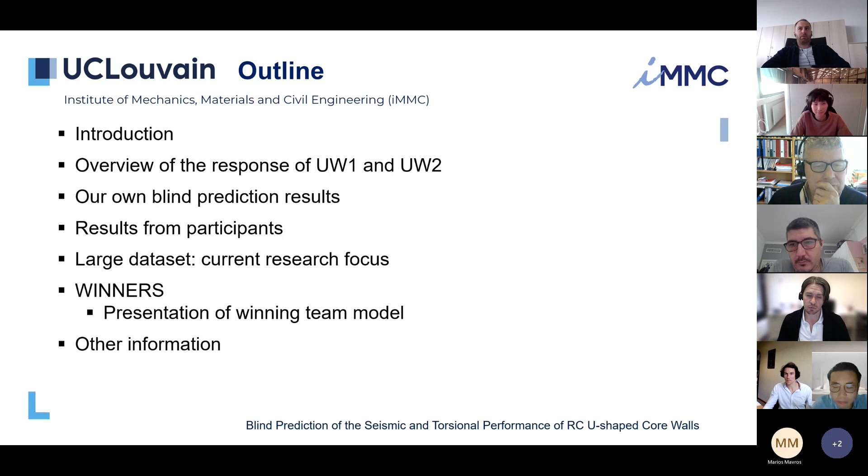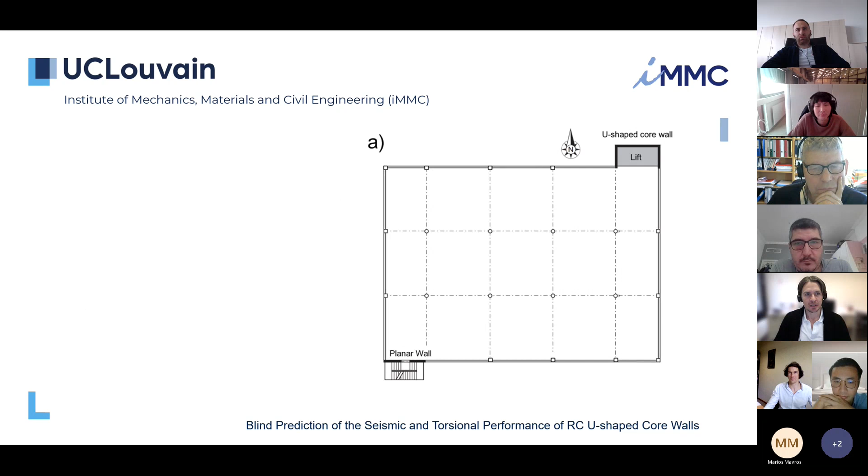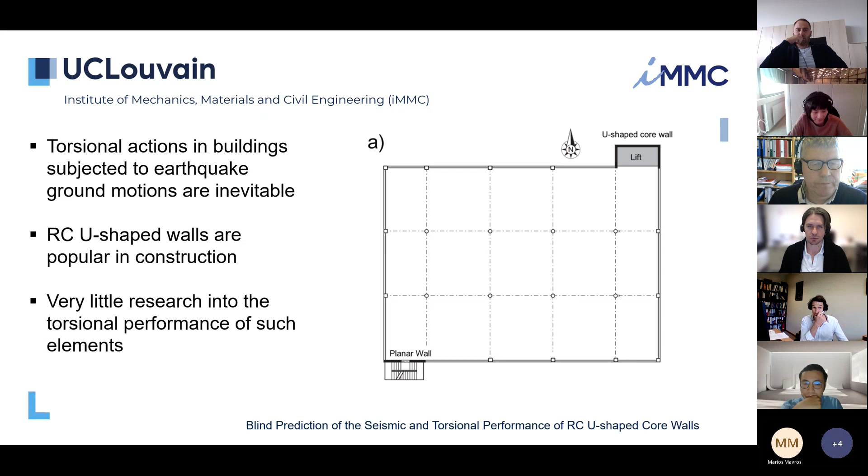So just a quick overview. Torsional actions in buildings subjected to earthquake ground motions are essentially inevitable, and reinforced concrete U-shaped walls are very popular in construction. A good analogy is a building like the plan on your screen, where you have this U-shaped core wall essentially enclosing an elevator, on the periphery of the building. If you get strong north-south ground motions, as an example here, you can expect this building to essentially twist, so this wall will essentially be resisting all of those earthquake ground motions.

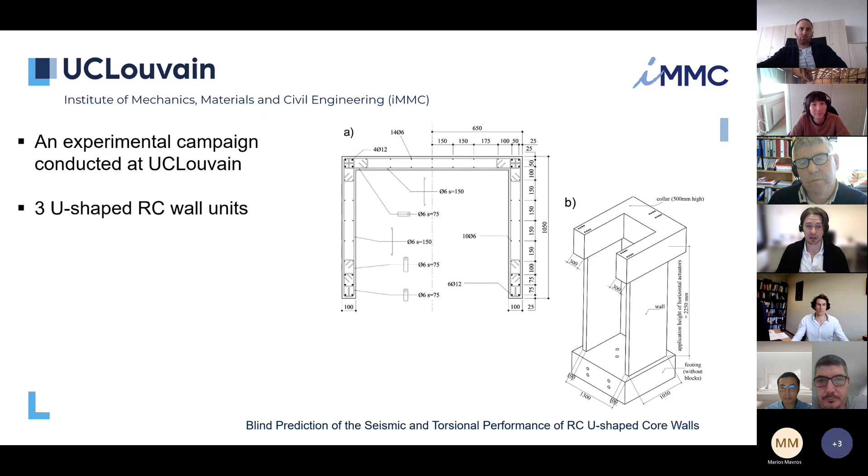Very little research has actually gone into looking at the torsional performance and also the torsional capacity of such elements. So we recently conducted an experimental campaign. We looked at 3 different U-shaped wall specimens, and the first 2 of these specimens were the focus of the blind prediction competition. That was primarily just for timing - we wanted to give as much time to you as possible, although we know it was only a couple of months, and I think that was over the summer break.

So I think that was a little bit difficult for everyone. But yeah, so the first unit, UW1, was subjected to in-plane bending, so governed by flexure, and the second wall was, of course, rotated about its vertical axis, so with torsion.

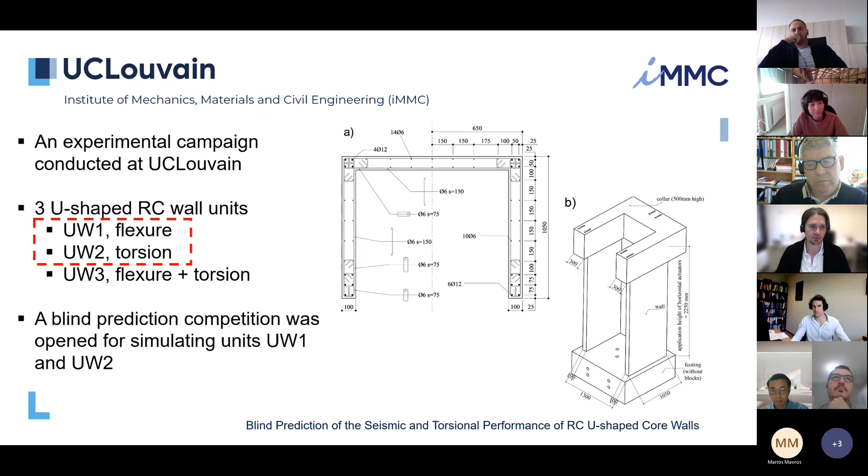Just again, a quick summary - I know a lot of the participants are here with us, and you certainly already know this, but for everyone else, basically we wanted to make this a really complete blind prediction competition where we didn't just focus on things such as force and displacement. So we actually made this compulsory information - you essentially had to give these predictions to enter the competition - focusing on strength and capacities. So for the first wall unit it was really focusing on force and displacement capacities, the second wall unit was focusing on torsion and rotation, so ultimate torques, for example.

The second thing that we asked for, which we called optional information, was looking more at the local sort of performance of the wall - things like the maximum tensile strain at a certain position or at a certain drift level, or the residual displacements for certain in-plane drift levels. We thought that while these things were very difficult to simulate, you were rewarded a lot of other points if you had really good estimates. We thought that was really an exciting opportunity to include in our blind prediction competition, which was a little bit different from previous blind predictions.

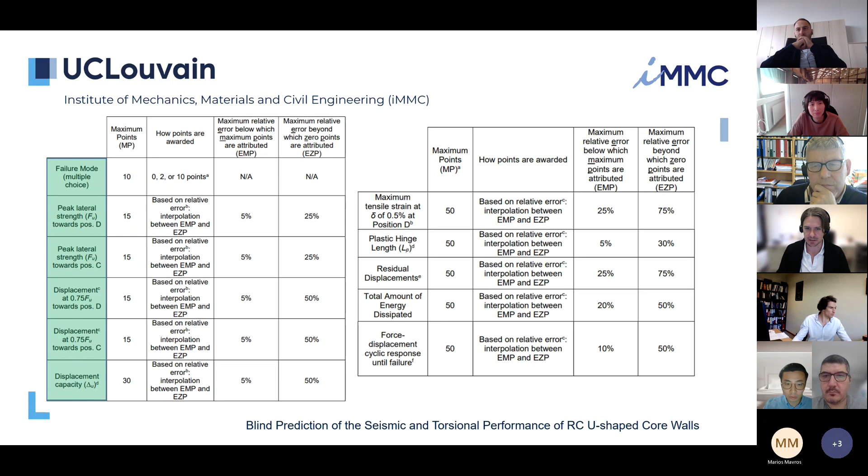Okay, some quick videos. I hope that the bit rate of the internet here will actually show these reasonably well.

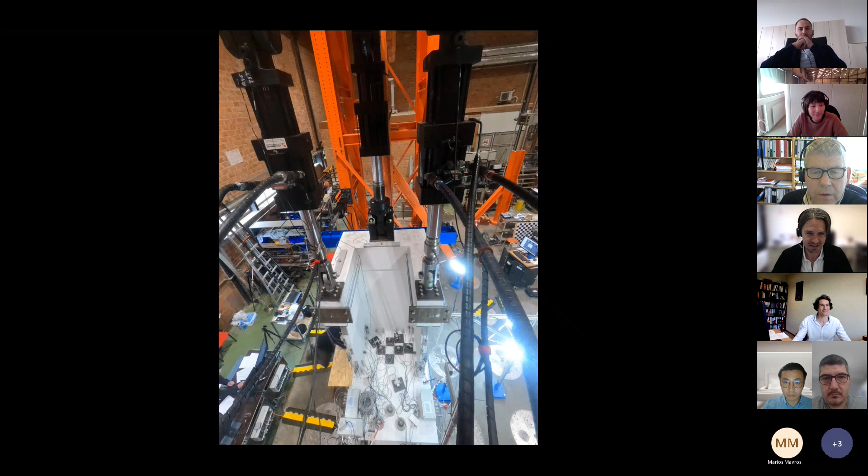This first video is looking at the first wall specimen where we had the vertical actuators. The vertical actuators were applying the axial load as well as the overturning moment, and you can see there's two horizontal actuators at the back applying the horizontal force and displacements.

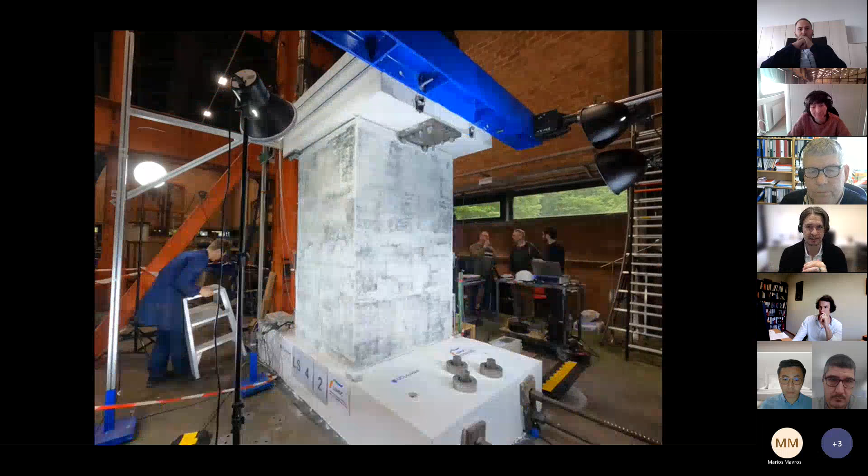This is a video from the back of the wall of the first wall unit. Again, you can see these actuators were connected with the beam. That was primarily for the second wall specimen where we really needed that beam to increase the torque applied. It wasn't really necessary for this first wall, but we wanted to keep the same test setup for all of the wall specimens.

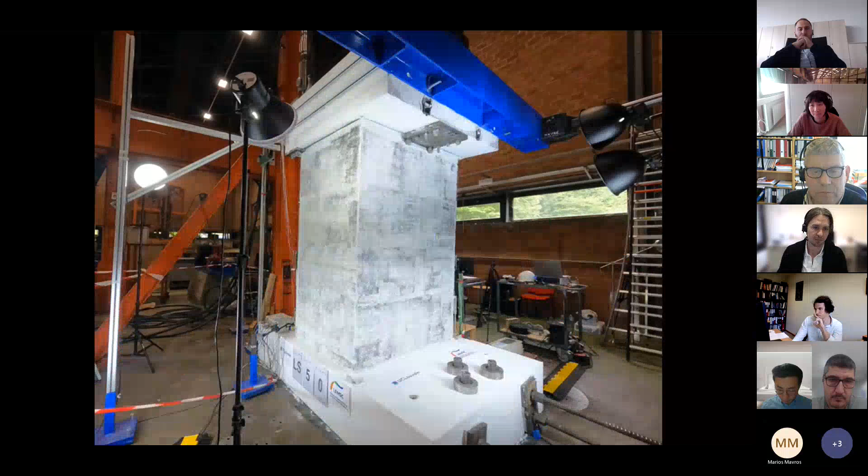This third video, again, is of the first wall specimen, but it's going to show where the failure occurs on this flange end, where you'll see some crushing failure and the buckling of the rebars. I think it accidentally just paused, so you'll see it there.

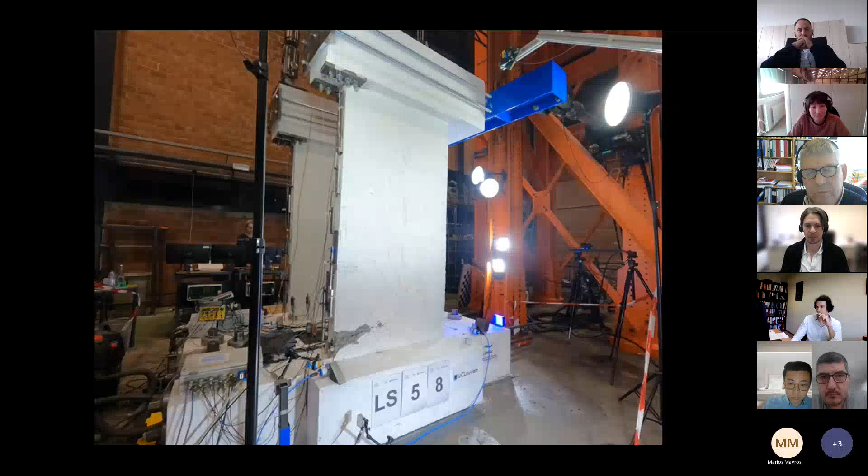The second wall unit was rotated about its vertical axis in reverse cyclic motion, and this video will clearly show where the failure occurred. This was a little bit more complicated in terms of its failure mode than the first, and really required a lot of observation in terms of how it actually failed and where. You can read all this in the report that we'll release after this presentation.

In terms of our own blind prediction results, we wanted a really good estimate of what sort of forces and displacements we were expecting to see in the experiment. We just did some simple pushover analyses, but using a fairly sophisticated program called VecTor4.

This is for the first wall specimen, so we had to model the actual shear span that we were applying. Instead of just making a model that was about 2.25 meters tall, we had to apply the entire shear span up to about 6.5 meters. In comparison to the experimental results, it actually did reasonably well. It wasn't able to model the buckling we observed at the boundary end, so it did overestimate the displacement capacities a little bit, and overestimated the forces a little bit.

But overall, pretty good. And once we have these experimental results, we can get a much better result by tweaking a few things and making it a little bit better.

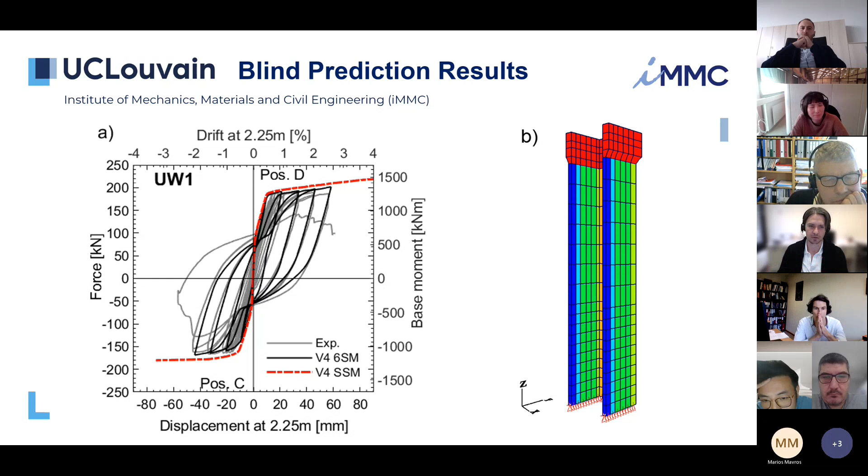You'll see here as well, this red line is the SSM, the single story model. So that's when I have just the single story, the test unit height, and I've applied a force controlled analysis using all the forces we actually applied experimentally. This is the single story model instead of the actual model to the shear span.

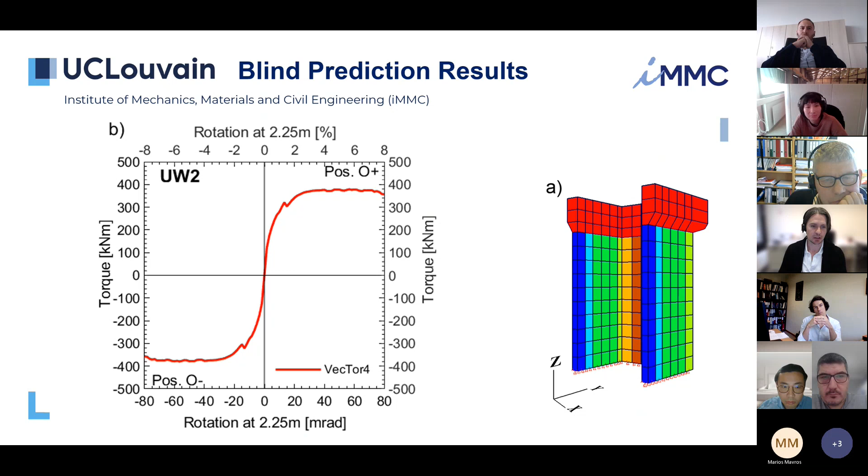We use this model for the second wall specimen. This was our best guess in terms of the expected torque and rotation, and this is what we saw experimentally. It actually really underestimated the torque that we got, and it really overestimated the rotation capacities as well.

What was really important for us in modeling this was really modeling the head of the wall, where in previous numerical models, where we had the wall just bending in flexure, we essentially made this head of the wall really, really stiff to remain elastic, which it typically has throughout these experiments. But for this torsion wall, we actually had to relax that a little bit.

And we got much better results, of course, once we had those experimental results. So we're still working on these numerical models, and we do plan to do a little bit of work in this area in the very near future. I guess we'll have a little bit more to say on that towards the end of the presentation.

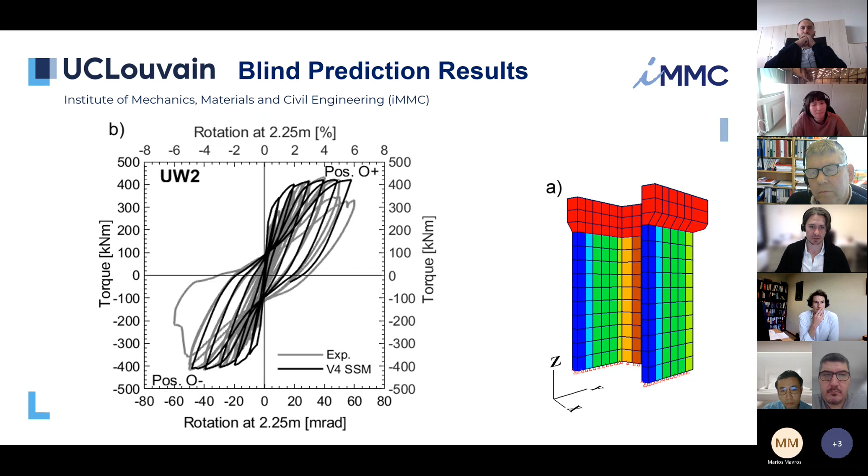I should say that we had 15 applicants in total. In the report, which I will send via email to all participants and registered users just after this presentation, it will show which program was used by which different participants.

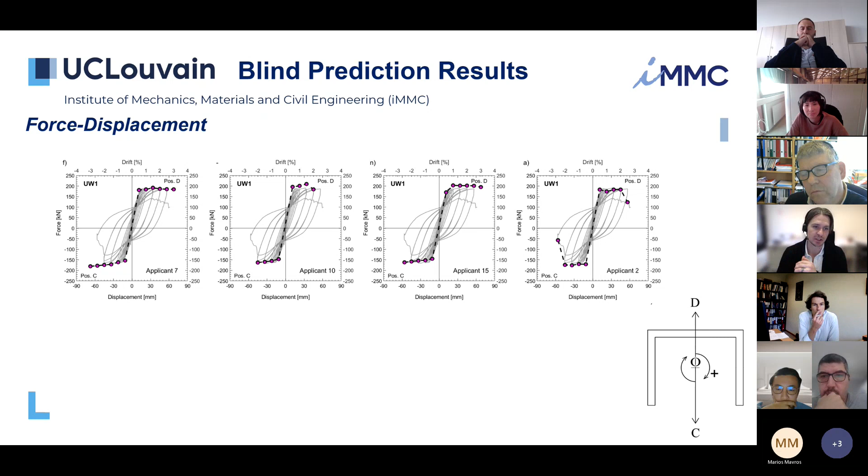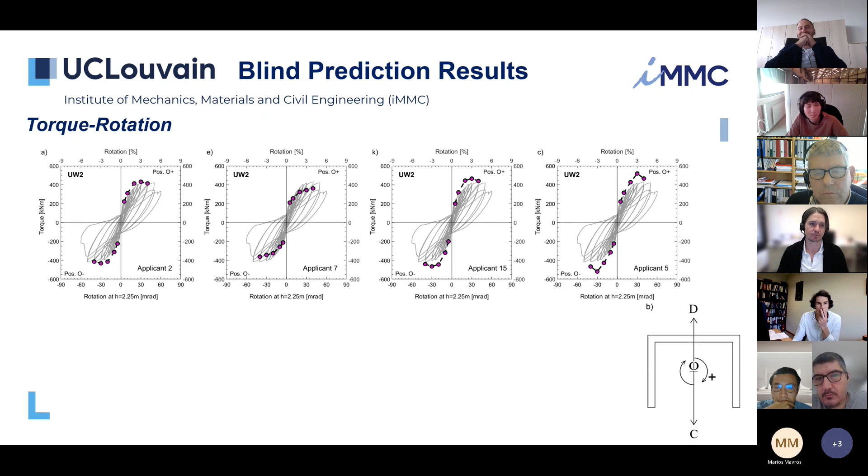One of the things we focus on in our research team is residual displacements of reinforced concrete walls, which was one thing we asked for in the optional information. For those unaware, residual displacement is the displacement achieved on returning back from an in-plane displacement or drift, when the force is equal to zero. We typically look at these as a function of the displacement or drift achieved.

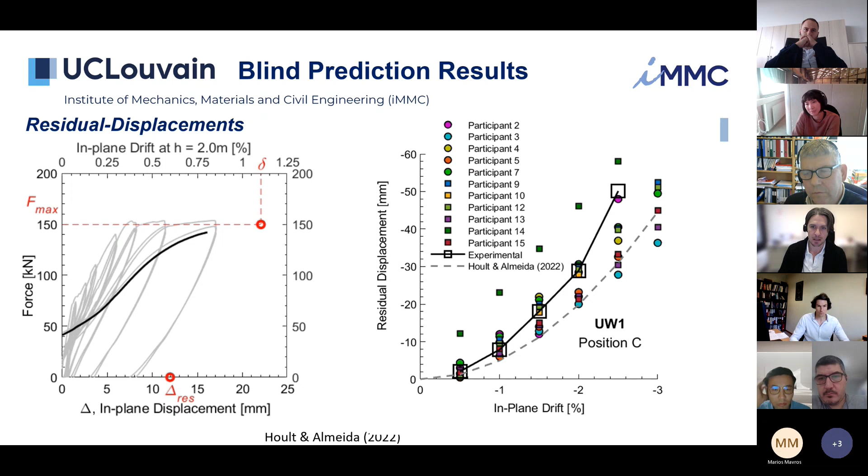This is a plot of the residual displacements given by all the different participants. The experimental results are shown in the black square symbols. You can see some participants had strong estimates compared to what we observed experimentally. This is the residual displacement toward the position where the wall failed for the first wall unit; we also had residual displacements in the other direction, which gave interesting results. This gray dashed line came from an expression that João and I derived earlier in the year, looking at a large data set of experimental walls, taking an average line of all the residual displacements.

Something, Ryan, that was maybe good to note—I guess there are relatively few U-shaped walls there, right? That can partially explain the difference.

I think there were a few reasons for the difference between the experimental results and the gray dashed line. If you look at the residual displacements in the other direction, it's actually a very good match toward position D, which is governed by tensile strains in the flange end. I think buckling that started occurring quite early really affected the residual displacements in this direction. In this database we used a lot of different walls, but many of the tested walls are planar in cross section, which could be one source of the variability.

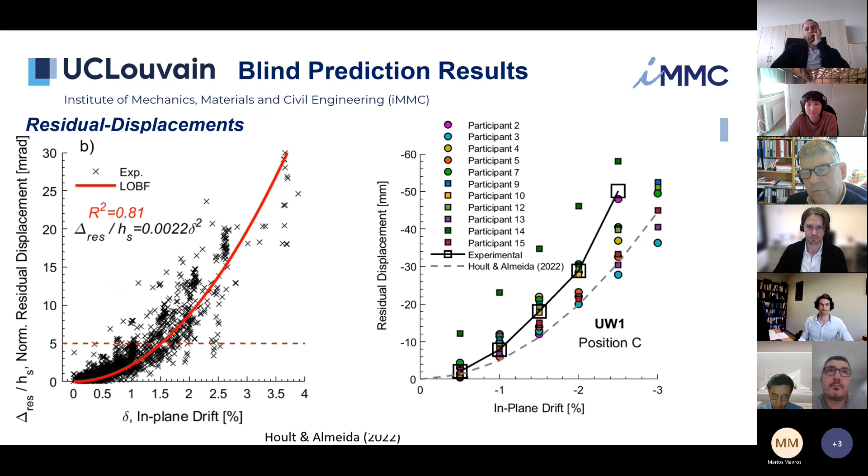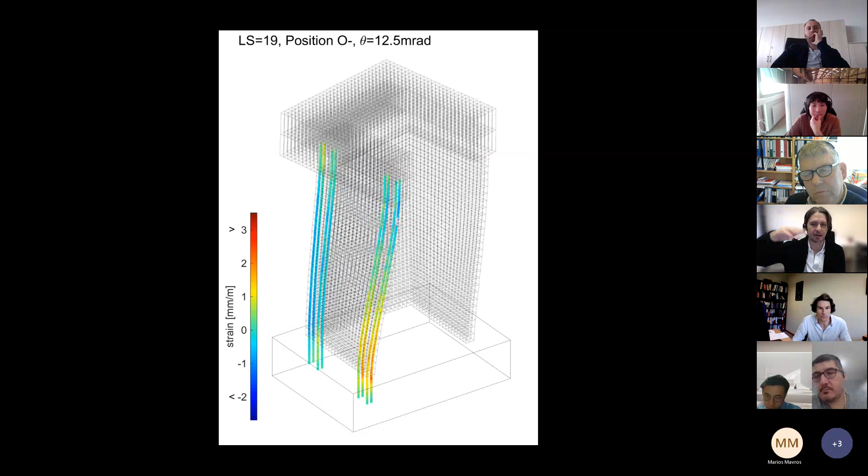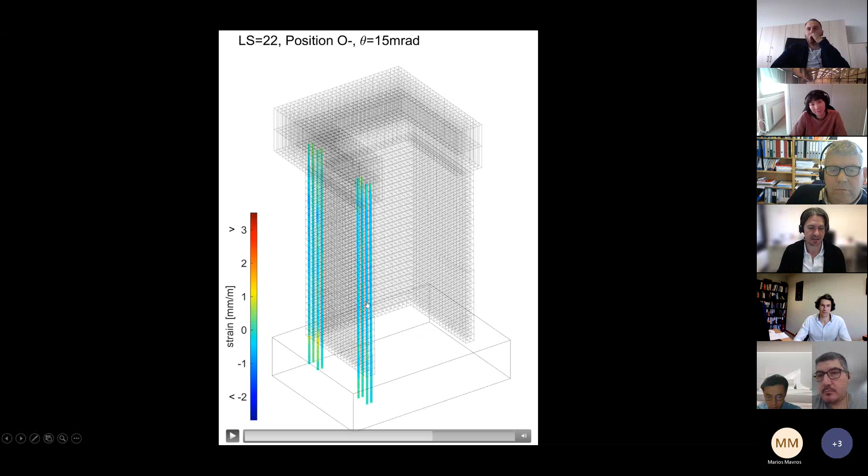One of the exciting things for our research team was using distributed fiber optic sensors, attached to 8 of the longitudinal bars in the wall. What you're seeing here is a finite element model grid, but the colors representing different strains in the rebar are experimental measurements. These strains are at really high resolution—along the rebar length of about 3 meters, we're seeing strain increments every 0.65 millimeters, and importantly, strain penetration into the foundation, which was really cool to see.

This is how we were able to answer one of the optional information questions: what is the maximum tensile strain in the bars for a specific rotation and position. The black line is the average of the two rebars, and this white circle is the maximum of the average, which is what was actually asked for in the rule sheet. It's interesting to note the dark blue and light blue profiles—the two different strain profiles for the bars at this flange boundary end.

If we look at the strain profiles for the first wall, which was just pushed back and forth, the strain profiles are actually very similar—you really can't tell the difference between the two. But when you have warping torsion and a bit of circulatory torsion in these flanges, you do see a difference in the strain gradients through the thickness.

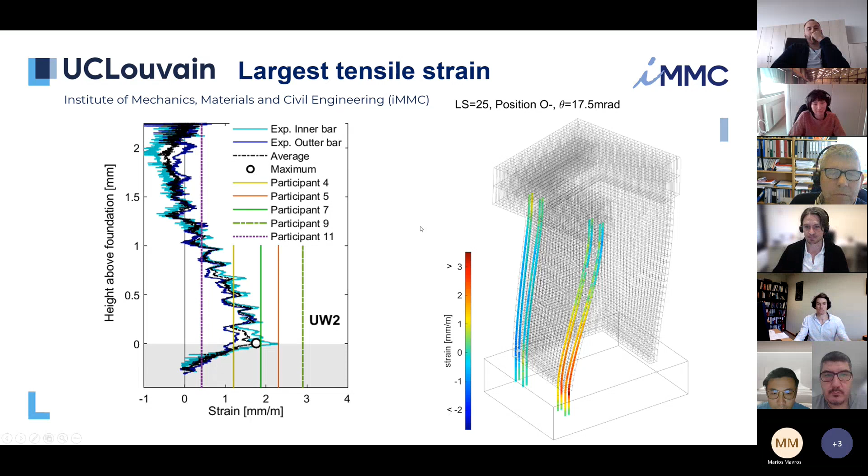A quick note on the current research focus using this large data set from the walls: now that we've got strains within the wall core, we're looking at how they compare with surface measurements made with things like the LVDTs, shown here. We had 8 rebars in total giving us a nice strain profile in the wall—how do they compare with the LVDTs on the surface?

This is just an obvious quick point—clearly you don't get that strain penetration with the LVDTs, so you can really see the difference in terms of the strain profiles that you get.

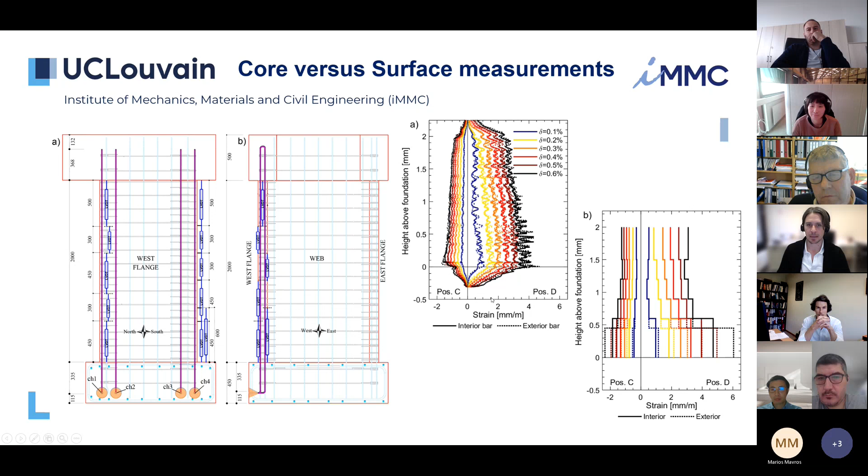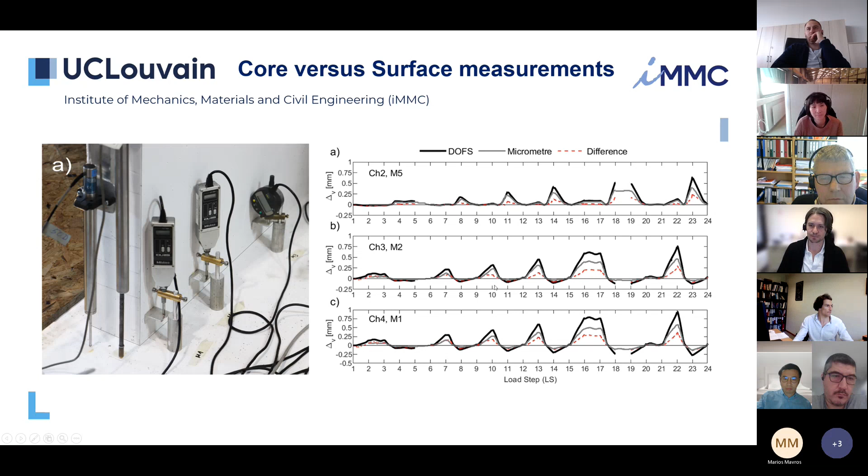We're also making comparisons with things like the micrometers. Again, with surface measurements, you can clearly see the vertical displacement is quite different from what you see inside the wall with the distributed optical fiber sensors compared to the micrometers in the wall. Lastly, we're also making comparisons with DIC, digital image correlation techniques.

I won't go into too much detail here, but we're really using these measurements from the fiber optics to provide some sort of guidance in terms of what gauge length or base length you should be averaging your digital image correlation results over, to arrive at strains and values that are more representative of what we actually see with large scale structures such as these walls.

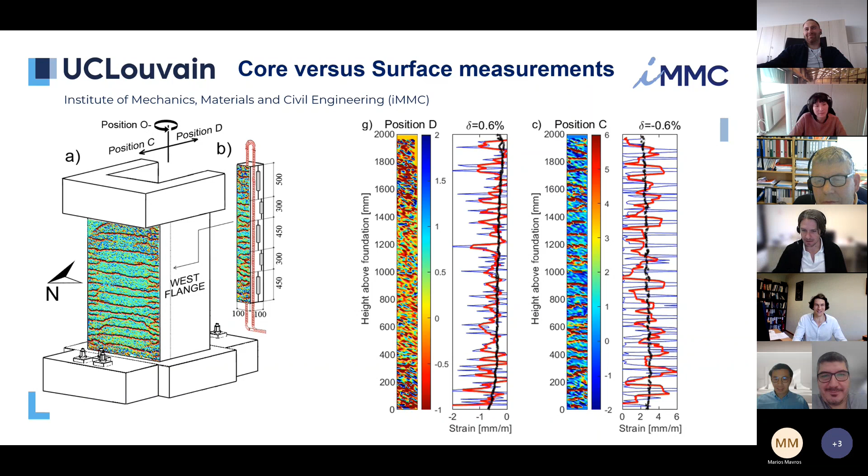Don't be shy. I think you're all eager to find out who won then. Okay, so if that's the case, let me pick this over and let's go.

Okay, so drum rolls, I do the easy part of the job. So the Oscar goes to... actually I should already say that the Oscar goes to both for UW1, the first test unit, and the second. They go to the same team, actually.

So Ryan, it goes for the team composed by Manos Mavros, Juan Murcia Delso, and Marios Panagiotou. I think only Manos is from the University of Cyprus. Actually, I think Juan is from Universitat Politecnica de Catalunya, and Marios Panagiotou works for a private company at this point.

So they have done an excellent job. I think we don't show it in this presentation, but the results for UW1 were very similar in terms of points to the second and third team, which I will present right after. For UW2, the difference in terms of points was a little bit larger.

So second and third place now. For UW1, from UCSD, San Diego, we have Sergio Godinez, Andres Rodriguez, and Jose Restrepo; then from the Hong Kong University of Science and Technology, we have Shenghan Zhang and Liang Liu; and from Switzerland, from the Federal Roads Office, Raluca Constantin. So these are the first, second, and third place for UW1.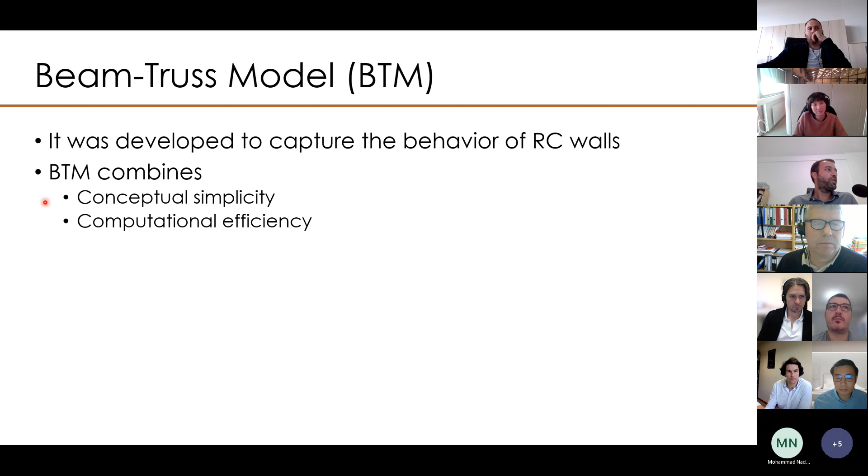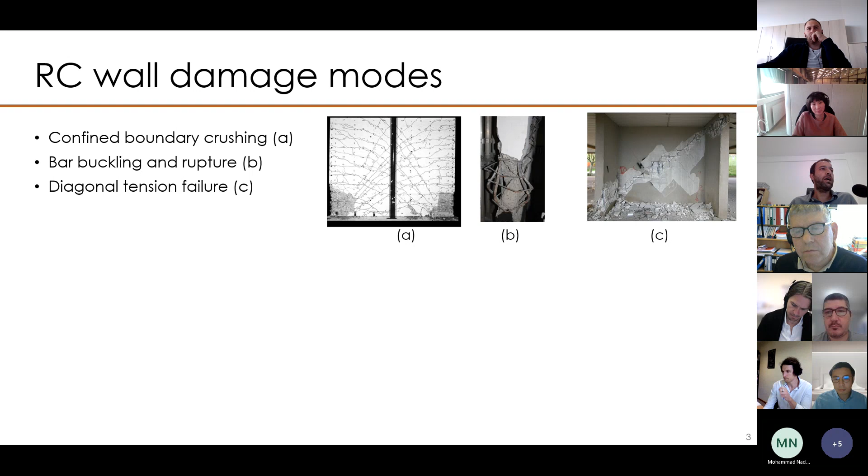The failure modes of reinforced concrete walls observed in past earthquakes are usually more complex than those of beam and column members, and can be affected by a multitude of damage patterns like flexural failure of confined boundary regions in the form of concrete crushing followed by bar buckling and rupture, diagonal tension and compression failures with web crushing, global out-of-plane buckling, and out-of-plane crushing of the walls.

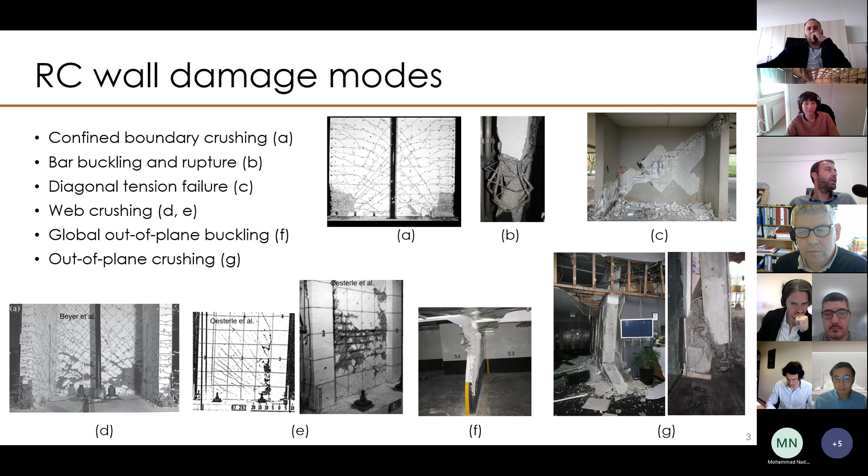Allow me to give a quick summary of how the method works, using as an example a portion of a T-shaped reinforced concrete wall. First, we discretize the section into smaller areas, and then we determine the areas of steel and concrete.

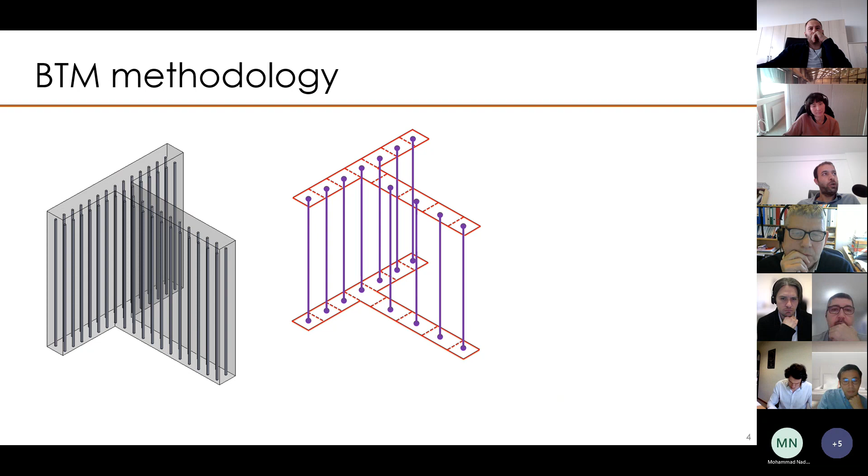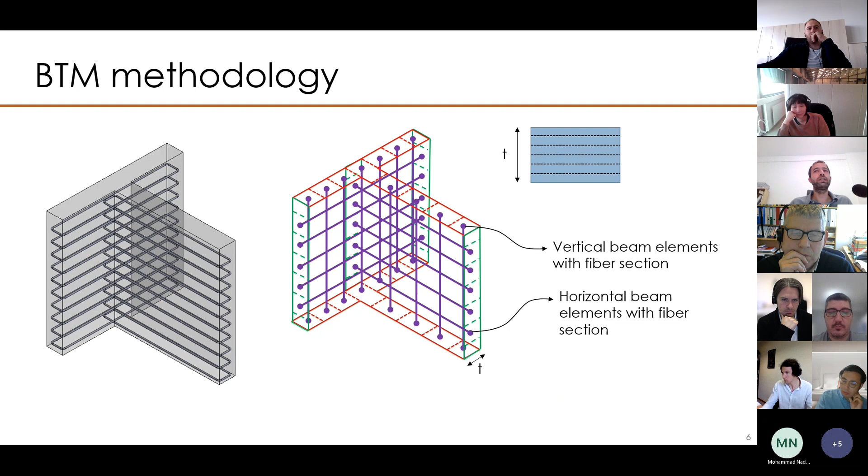The method uses vertical nonlinear fiber section beam elements to represent the vertical areas of concrete and steel, and exactly the same thing happens in the horizontal direction with horizontal beams. Both horizontal and vertical beams have fibers that represent steel and concrete only along the thickness of the wall, hence they can develop only axial and out-of-plane stiffness.

The in-plane stiffness comes from the inclined trusses. A critical part of this method is that the inclined trusses can model the diagonal compression field of concrete, accounting for biaxial effects, done at the material level using a beta reduction factor that I will describe in the next slide.

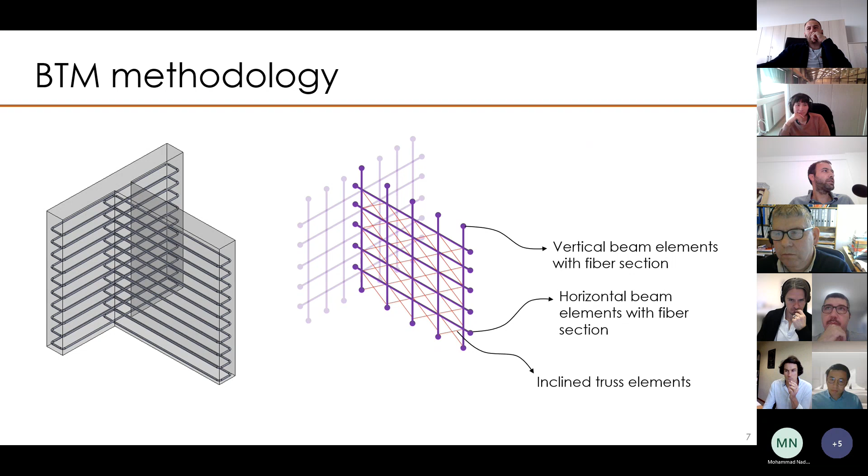For the concrete material law, we employ a constitutive model by Lu and Panagiotou, which can account for the strength degradation of unconfined concrete in uniaxial compression and tension. It can also account for the increased strength and ductility of confined concrete, and includes appropriate unloading and reloading rules to account for the cyclic hysteretic behavior of the material.

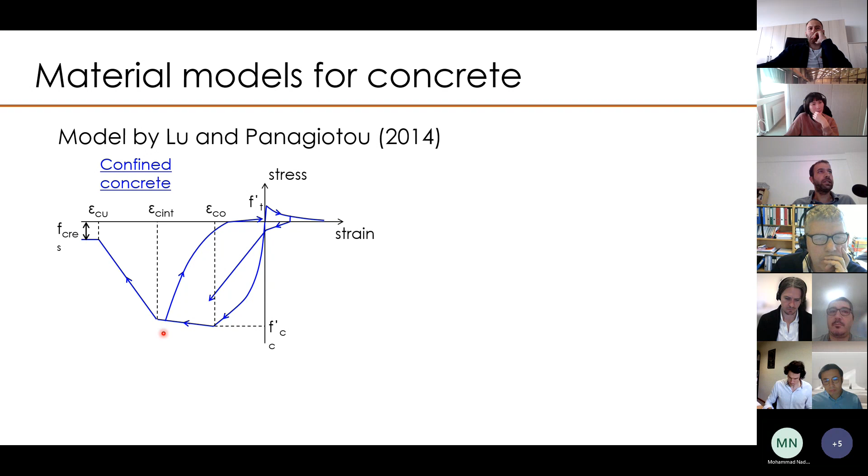For the inclined truss elements, which represent the compressive field, we took into account the effect of transverse tension in accordance with the modified compression field theory by Professor Vecchio and Collins. The idea is that if we have an inclined truss with compressive stress under the simultaneous existence of a transverse tensile strain, denoted epsilon n, the compressive stress of this element is multiplied by a reduction factor beta, which decreases with the magnitude of the transverse tensile strain.

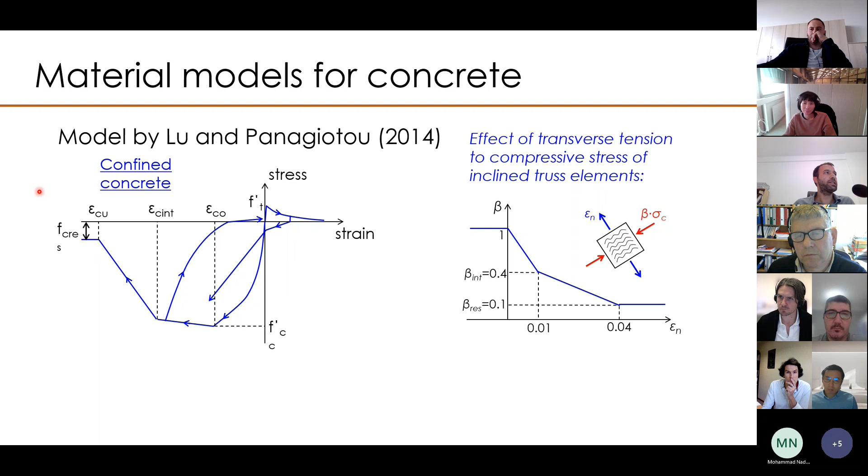Since the material law involves softening, we included an automatic regularization procedure to prevent potential spurious mesh size effects.

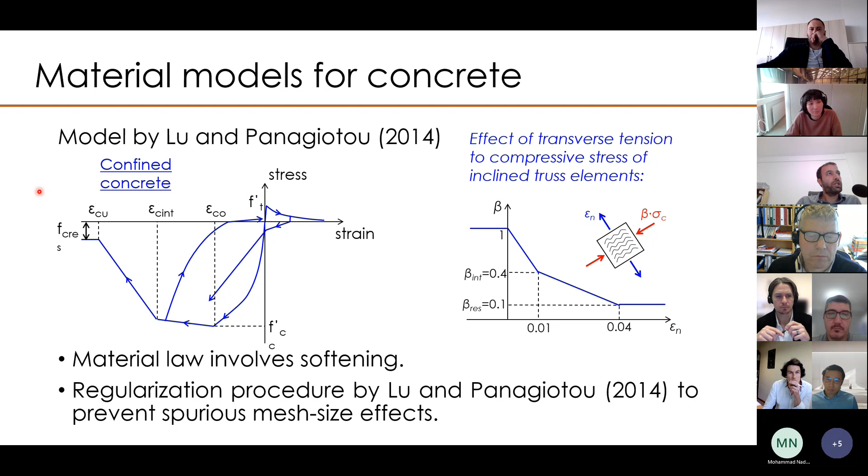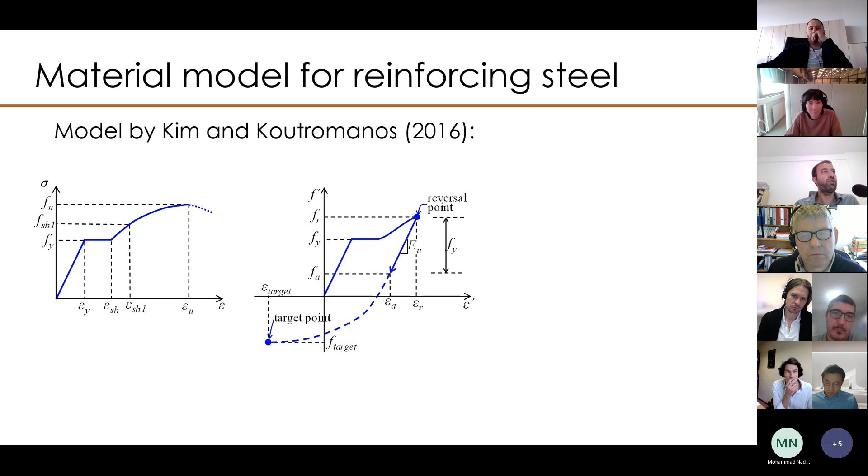We use the material model by Kim and Koutromanos for the reinforcing steel, which has been shown to be capable of capturing the monotonic tensile and cyclic hysteretic behavior of steel reinforcement. It accounts for buckling at the stress-strain level by appropriate modification of the stress when a buckling criterion is met, and the model can also account for bar rupture under monotonic or cyclic loading.

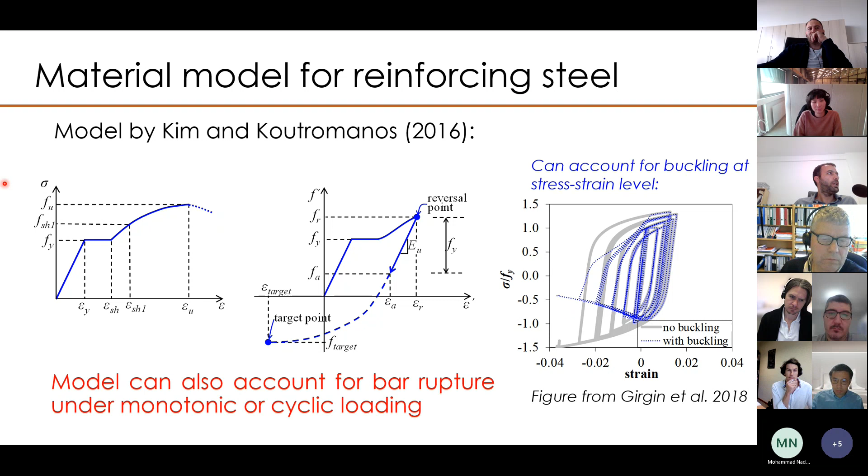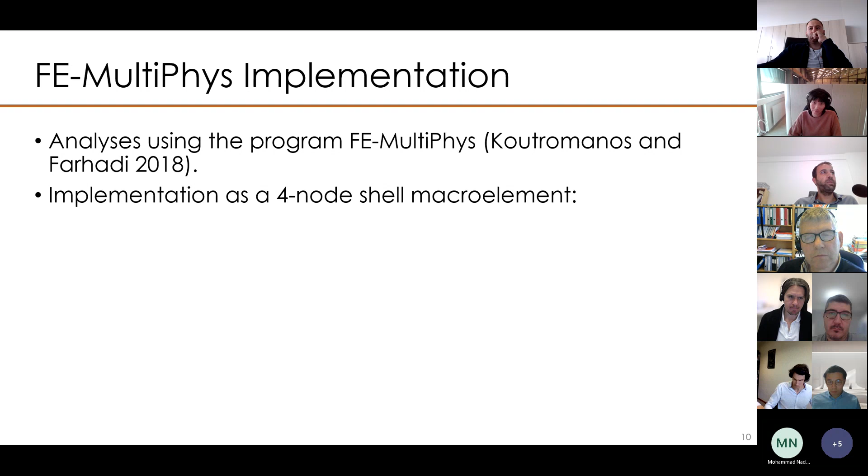We use an implementation of the BTM in the software FE Multi-Phys, developed by Professor Koutromanos at Virginia Tech. The main advantage of this implementation is that a BTM cell, consisting of 4 nodes arranged in a rectangular pattern with 2 vertical and 2 horizontal beam elements and 2 inclined truss elements, is actually implemented under the hood as a 4-node shell element, facilitating an easier pre- and post-processing experience for the user.

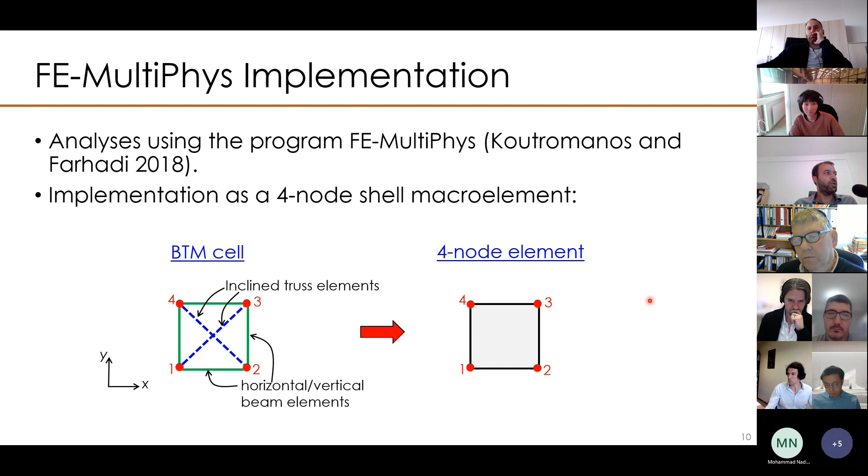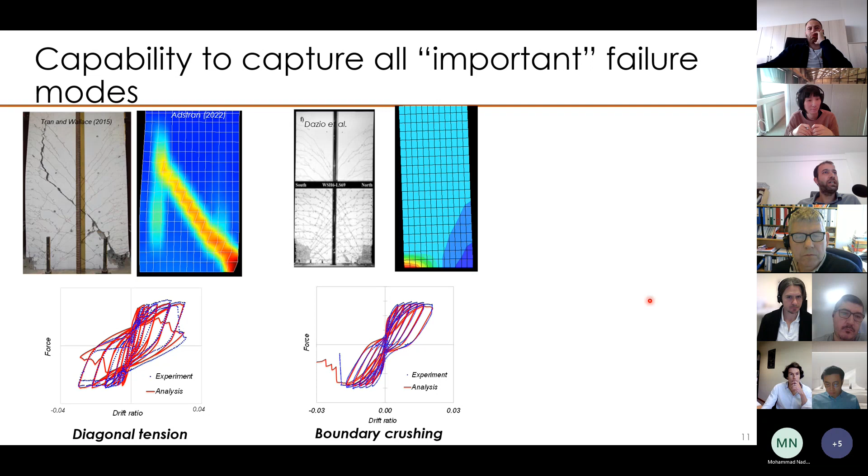It's important to mention that the capability of the BTM to capture all important failure modes of reinforced concrete walls has been validated and demonstrated through a series of previous studies in the literature. For instance, here I'm showing some of these studies capturing diagonal tension, boundary crushing, and even global inelastic buckling failure that can happen in thin wall segments.

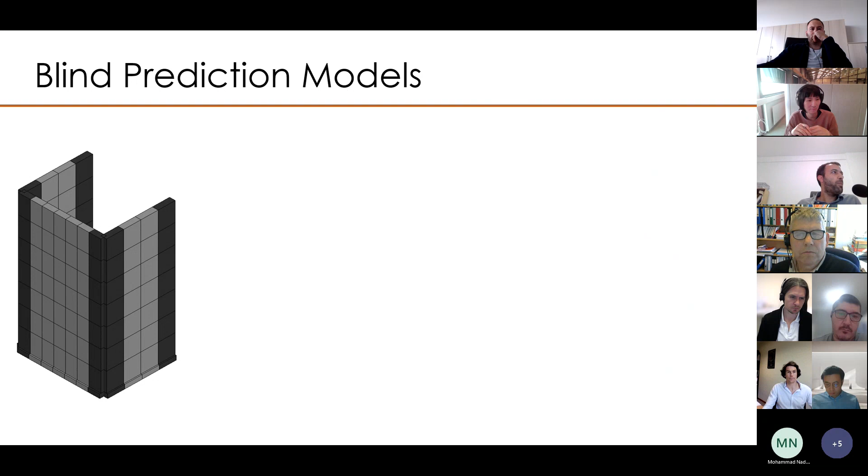Now let's move on to the analysis we performed for the blind prediction competition. Here you can see the mesh we used for both UW1 and UW2 models. The only difference between the two models was the loading condition and the calibration of concrete material parameters. The light and dark gray colored elements represent the unconfined and confined regions respectively.

I want to mention that, as I will show later, our assumption that the edges and corners of the walls are fully confined turned out to be wrong, and it led to an overestimation of the ductility of UW1.

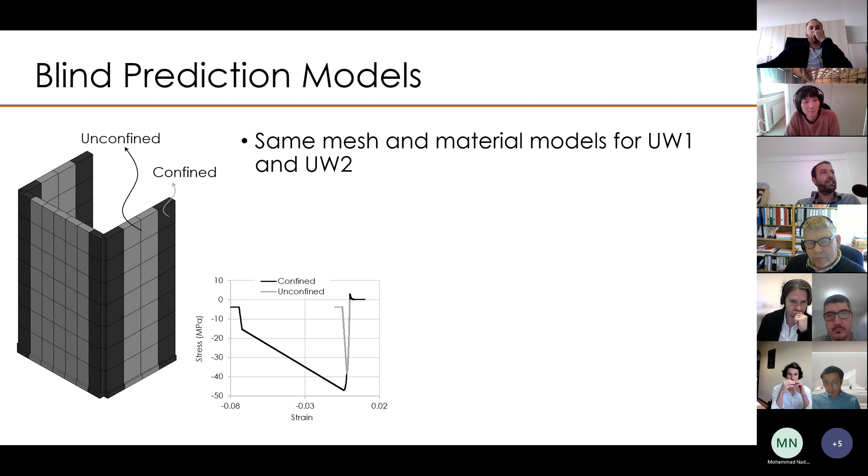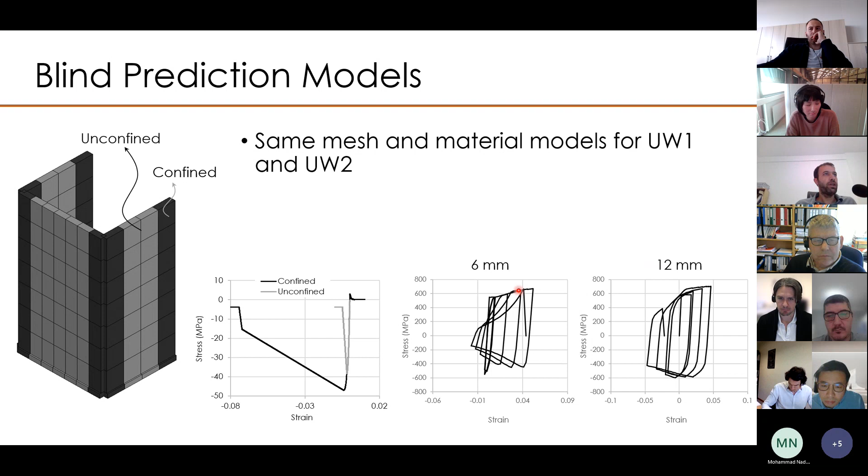In this plot, the uniaxial concrete law used for UW1 is shown, while the last two plots show the hysteretic behavior of the reinforcement for 6 and 12 millimeter bars, including the buckling and rupture for a typical cyclic strain history. Finally, since we didn't model explicitly the footing of the specimen, we included a row of elements at the base to capture the strain penetration effect.

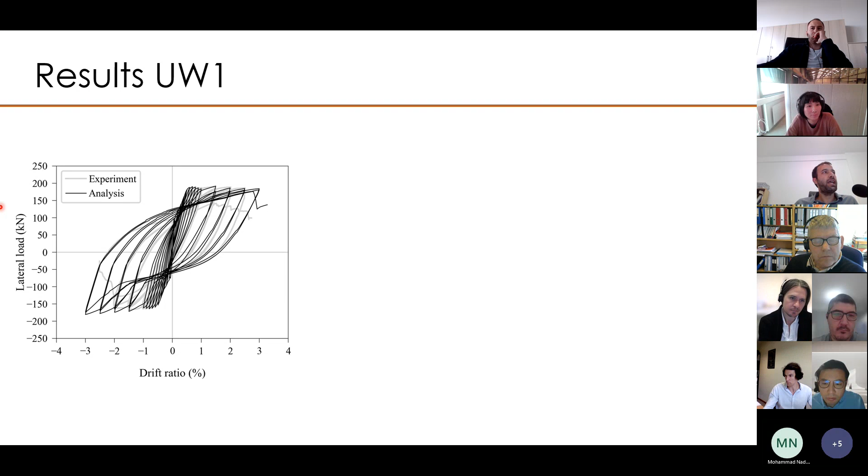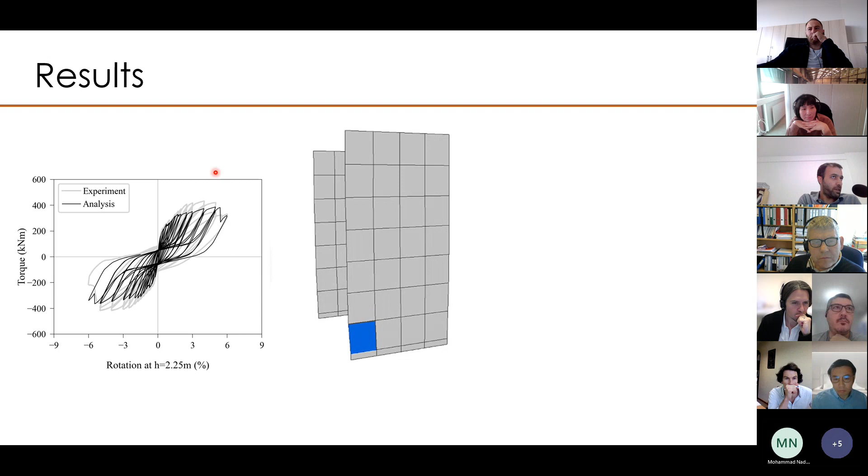On the other hand, for UW2, the model underpredicted the torque capacity of the wall by about 10%. We have some thoughts on why this is happening, and when we have access to full experimental data, we will try to modify the methodology appropriately to capture this failure mode as well. However, the model did a really good job predicting the failure loading cycle when it happened, and the failure mode, indicated by the hysteretic plot and the animation here, matched the same location that happened in the test.

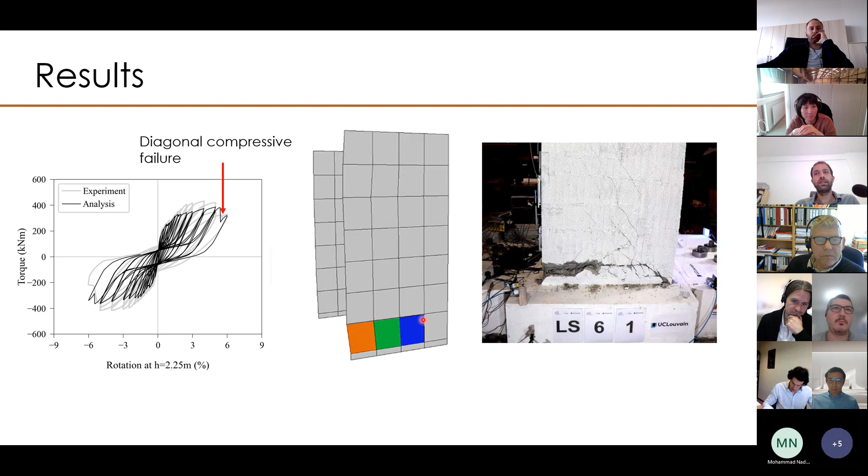We also ran a post-competition analysis to understand why the model of UW1 predicted a more ductile behavior in the case of the UW1 specimen. As I said, we believe that what we overlooked at the blind prediction analysis was the fact that the specimen had walls only 10 centimeters thick, and the cover area in the confined regions, that should be modeled as unconfined concrete, constitutes about 50% of that area.

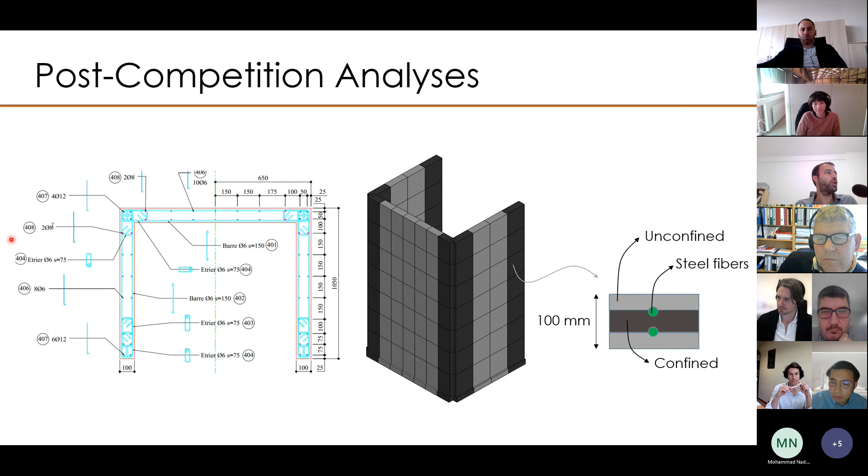Hence, we modified the beam fiber section at the edges and the corners to include both confined and unconfined concrete. With only this modification, the updated model was able to better predict the failure mechanism and the failure displacement. And by looking at the deformed mesh, you can also see the buckling of the BTM element at the bottom edge of the wall.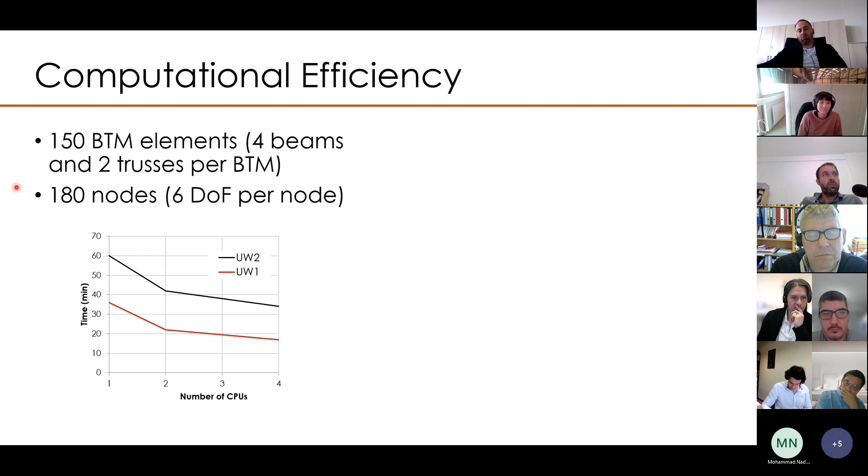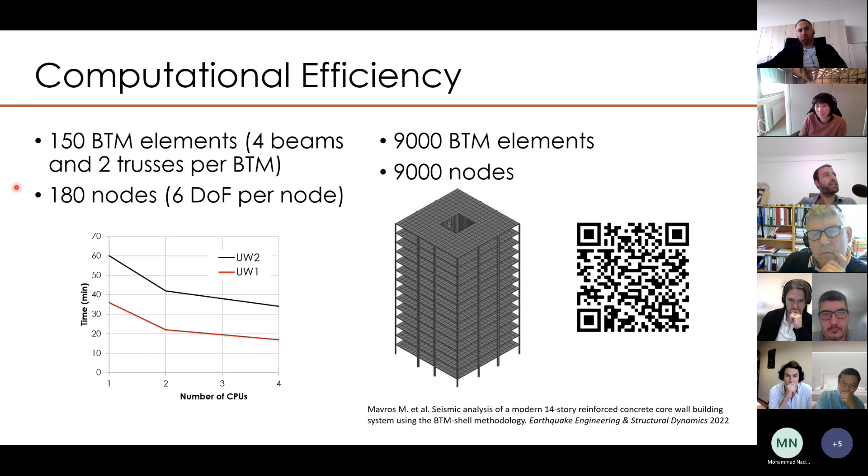This capability allows us to run full building systems. In fact, we recently published a paper with static analysis on 14-story buildings that had about 9,000 BTM elements and 9,000 nodes. We are now preparing the second paper with the dynamic analysis, and here you can see an animation of the most demanding motion.

This building had a core wall consisting of two coupled U-shapes, similar to what was tested in the blind prediction. What is important here is that we ran this analysis for the MCE level earthquakes that push the structure well into the nonlinear region in a reasonable time frame.

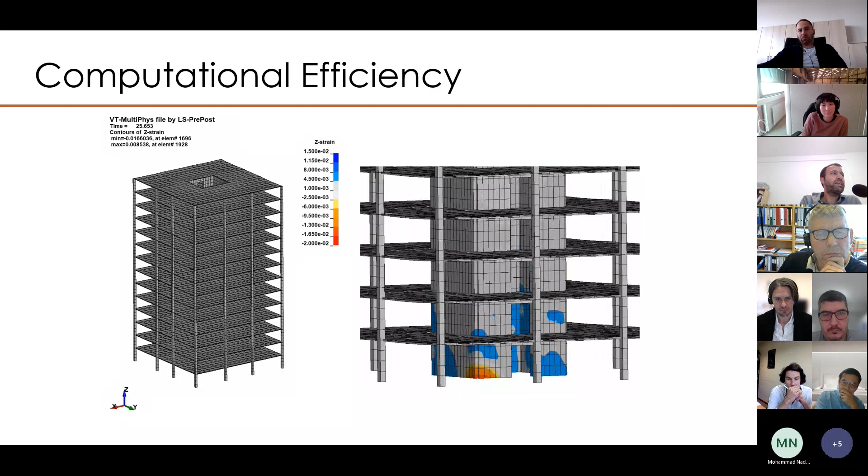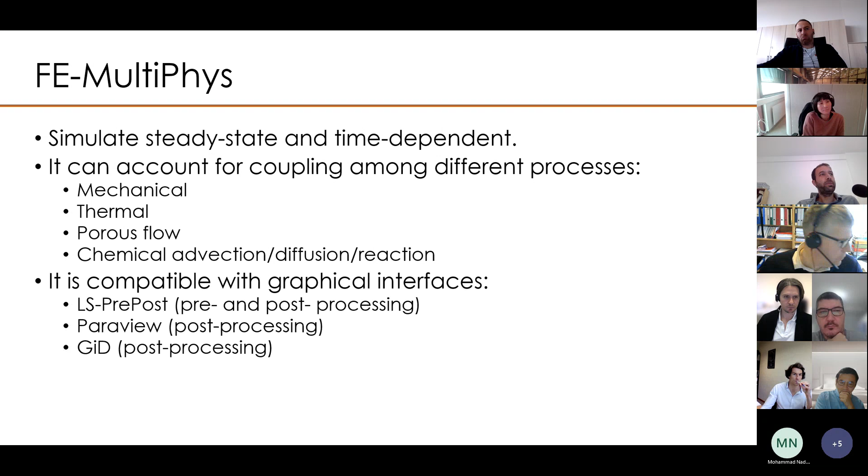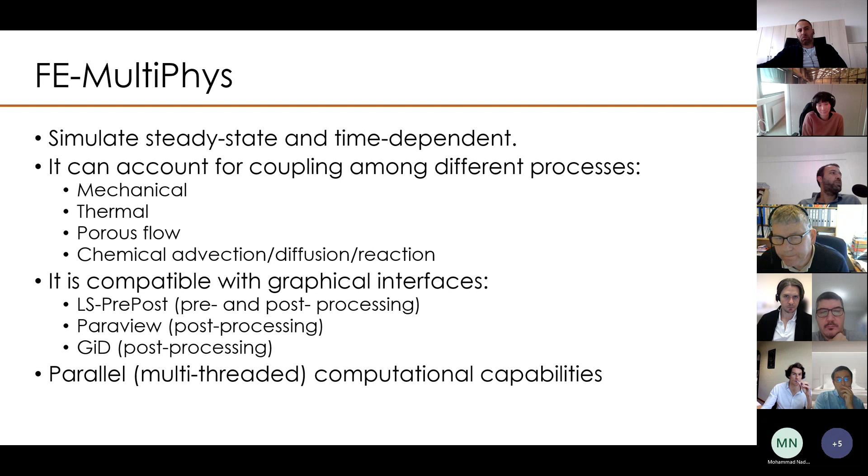Before I give the floor back to Ryan and Joao, I want to acknowledge the general contribution of Professor Yannis Koutromanos from Virginia Tech, who is the developer of FE-MultiPhys and constantly updates the program based on our needs. BTM is only one of the methodologies included in the software. FE-MultiPhys can simulate steady state and time-dependent problems, and it can account for coupling among different processes like mechanical, thermal, chemical reaction, etc. Currently, it's compatible with three pre- and post-processing softwares: LS Pre-Post, ParaView, and GID. As I showed before, it has parallel computational capabilities that are very easy to use.

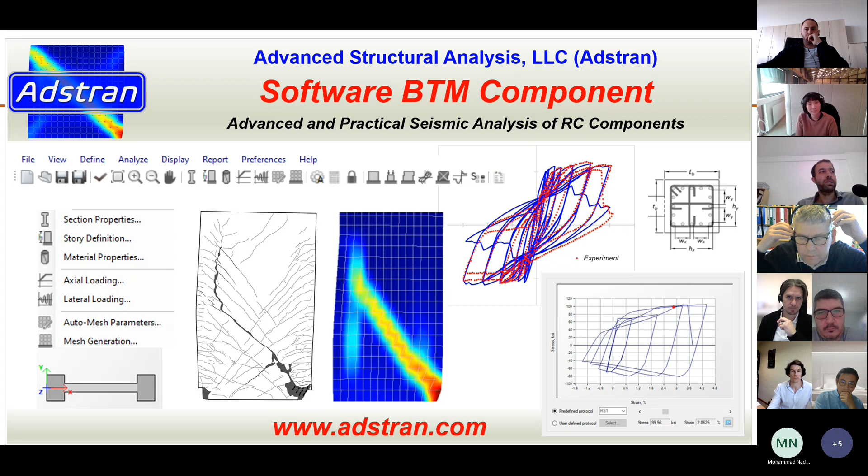One final thing I want to bring to your attention is the new commercial software BTM component by Adstran. This software is a powerful pre- and post-processor dedicated to analysis of planar walls using the BTM methodology, and it uses the FE-MultiPhys as a solver. The user needs only to input some geometric, material characteristic, and loading conditions, and the software creates the mesh automatically with all the information needed for the vertical, horizontal, and inclined elements that I mentioned before. At the end, it returns a nice report with the results indicating, for example, the failure modes and the maximum loads, etc.

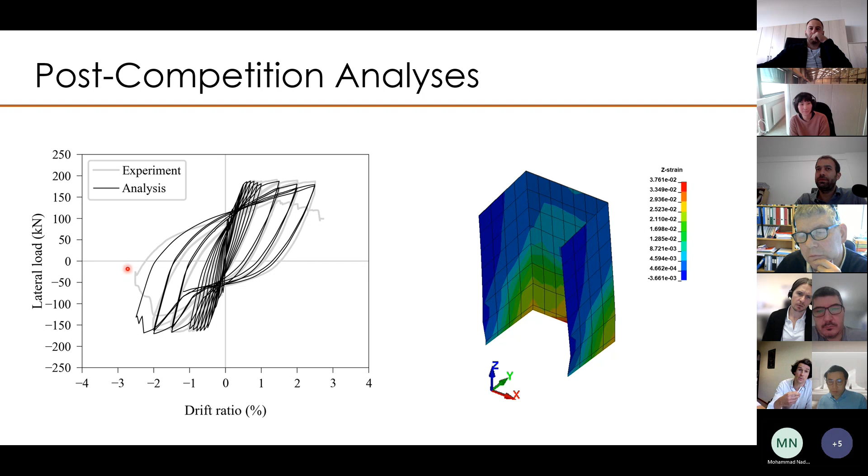And my other question was, because we exchanged a couple of messages, I was very interested in how you modeled the strain penetration, also because of all the results we're obtaining with Ryan, with the optical fibers. So Marios, how did you define the thickness? I think you said 5 times the rebar diameter. And did you compare the results without modeling the strain penetration?

Maybe you did not have time to do this kind of comparison, but did you see any difference? I ran, I think at the beginning, some analysis without the strain penetration. Obviously the rupture was happening earlier, if I remember correctly. But now, how we modeled the strain penetration: we use essentially some BTM elements, these short elements here, where we fixed all the nodes at the base, and at the top row of nodes we fixed all the degrees of freedom except the vertical one. So this node can move up and down, but not in any other direction.

And essentially, these BTMs have the same cross-section as the cross-section above it, with a little bit higher strength of concrete, so we don't mess up with any crushing in the footing, which we expect is not going to happen.

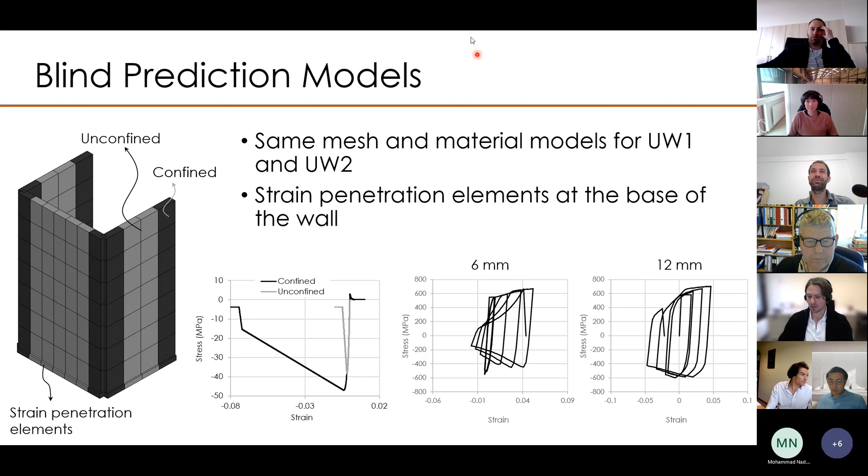So Ryan, shall I maybe share my screen again? Yes, or I could also share mine, but if you have yours there. So I don't want to take also 45 minutes. So basically just to wrap up and tease you a little bit for the next steps.

As Ryan said, and me as well, the report we will be releasing today. We will email it to all of you. I think all the people in this chat are participants, and you will be able to download it from today or tomorrow, maybe it's already available on our website. Then we are wrapping up a data paper regarding these experimental tests that we will submit to Earthquake Spectra, and hopefully in the next couple of weeks we should submit it, and let's see how long it takes to be revised.

I actually have to say, as you may have realized from updates on the website, we are not fully happy with the way our experimental tests occurred, because overall we are very happy, we have an excellent team here for our experimental tests, but we did have some problems with the construction of our specimens. We had to resort to an outside company, and unfortunately, especially for the UW3, the third unit, there were quite a few construction errors. You may have already seen that in one of our first updates, the concrete covers.

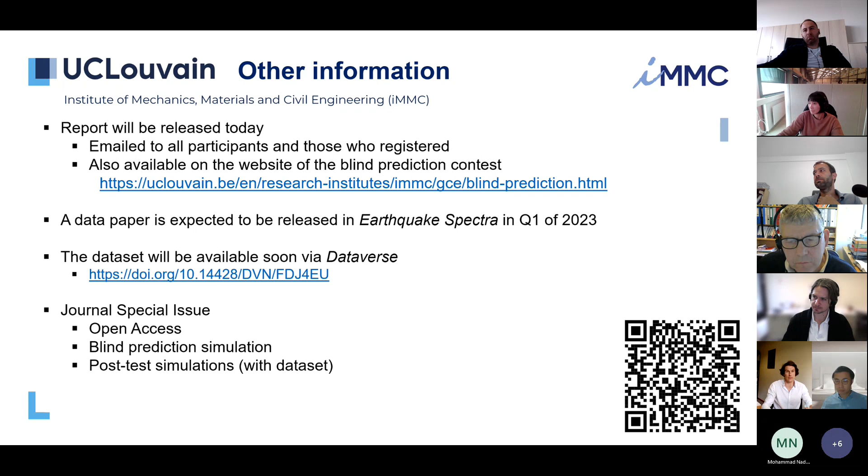So this is something that we will be doing. We will contact you, we will contact everybody. But of course the first three, the winners, will be contacted in first place, let's say. Okay, so that's the blind prediction simulation post-test.

So the cross section that we intend - if this is going to be financed, and you know that this is far from being certain - but you may recognize the cross section. It is exactly the same as the one of the current blind prediction test. We are talking about having a unit that has on top masses of around maybe 30 tons, more or less, so all with also the weight of the wall, foundation, etc. We've been talking about an overall weight of around 40 tons.

And so if these tests go ahead, we will certainly be launching another blind prediction competition. So Marius, you were showing us some results of a paper that I'm already now interested in seeing, like this 14 story building, also with the dynamic nonlinear response. So you have the chance to validate, hopefully validate, your model very soon.

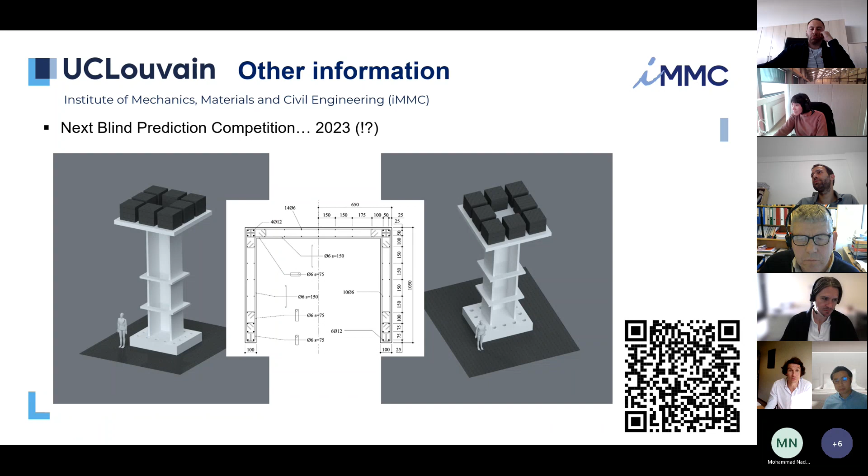Okay, so if this is funded, it will go relatively quickly, because although we submitted this proposal like a couple of weeks ago - it is for the IRIS project - I know they will decide if they fund it or not very quickly. So we will of course contact you all, preferably. Just so you know, the idea is to have 2 specimens, and so this brings us to the last slide. So there will be 2 specimens.

So this is just a small sketch to try to understand. The one on the left is a common U-shaped RC unit, with reinforcing steel as reinforcement all over. The second unit will be a unit where, basically in the plastic hinge region and in the extremities, in the boundary elements - which for the U-shaped wall will be the corner regions of the walls - we will be using shape memory alloys, shape memory alloy rebars.

And so the difference between the shape memory alloys, for those who don't know, is that they have a super elastic or pseudo elastic response. So upon removal of stresses, there will be no plastic deformations, or very little plastic deformations, and that is expected to be reflected also on lower residual displacements.

Okay, so the idea, again, if this will be funded, is to compare the response between the two U-shaped walls, one purely reinforced with steel, mild steel, and the other at the base changing partially, or replacing partially, some of the steel by these smart alloys.

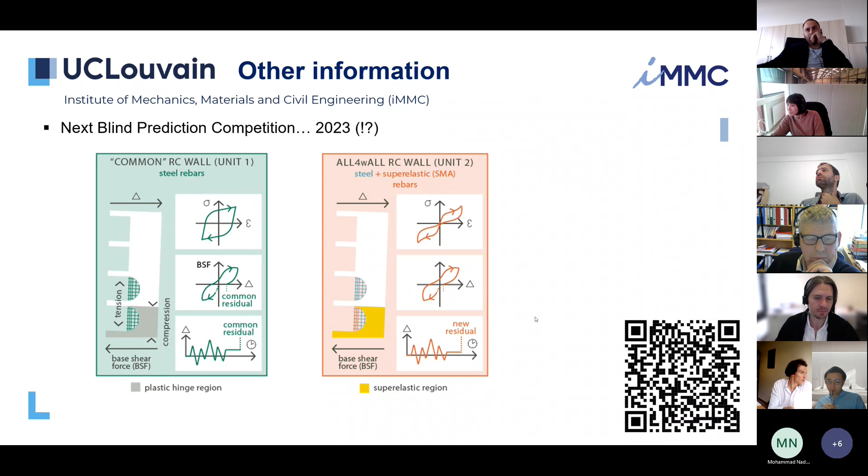We know that it was also, as Ryan said, not extremely convenient in terms of timing. We gave you very small time to give us your predictions, and it was not just a few weeks, but in the worst part of the year because it's when everybody goes on holidays. But we have many constraints in the lab, and we wanted to present part of the results at the European conference held in Bucharest about a month ago.